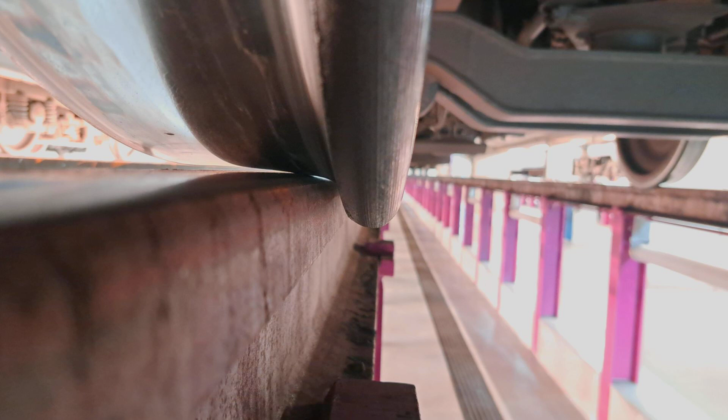Every train on Earth rolls on a contact patch smaller than a coin, 1 square centimeter between motion and disaster. The first rail wheel appeared 4 centuries ago, and how it turned friction into freedom is a story rarely told. In the dim galleries of 17th century minds, the future of movement rested on a circle of wood and iron.

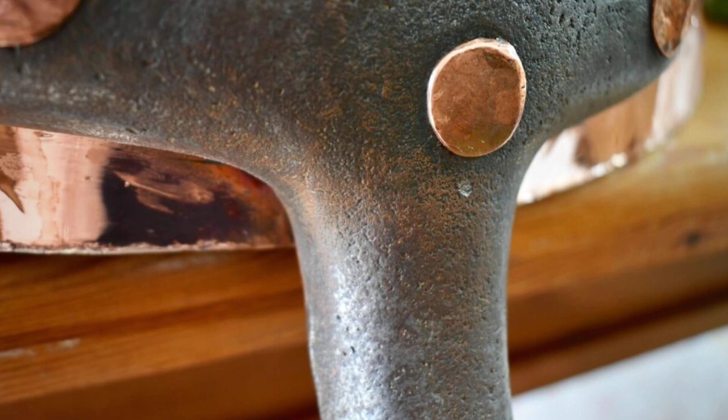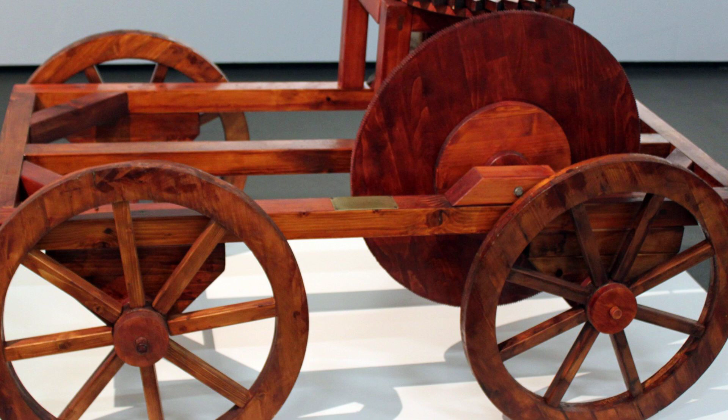Each turn of these wheels answered a stubborn problem: how to carry weight without grinding wood to dust. The iron rim did not erase friction, but it stretched the life of every wheel, buying days and weeks before the next repair. Yet even this hybrid, wood inside and iron outside, could not withstand the pounding loads that the coming age of steam would demand. These early wheels, humble and anonymous, set a challenge that would echo through every forge and workshop for centuries: how to turn the old enemy of friction into the promise of motion.

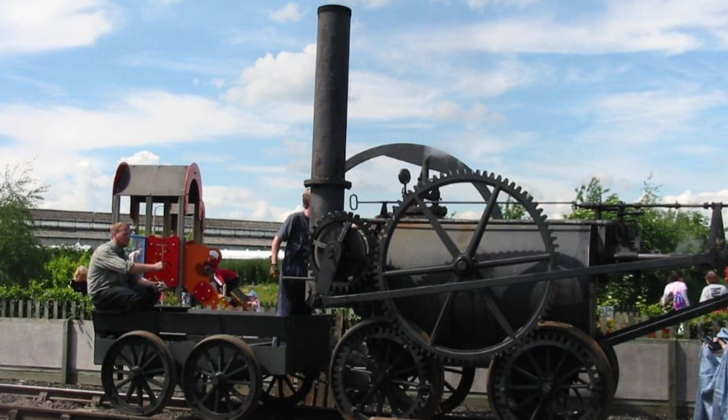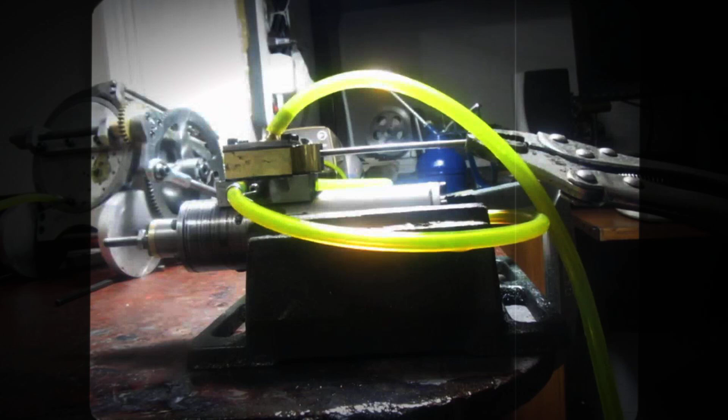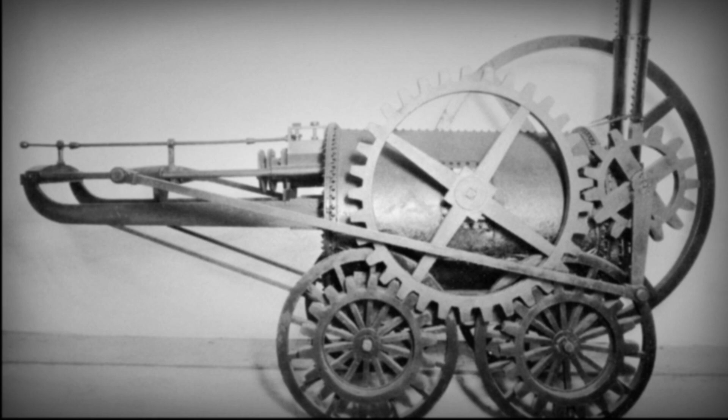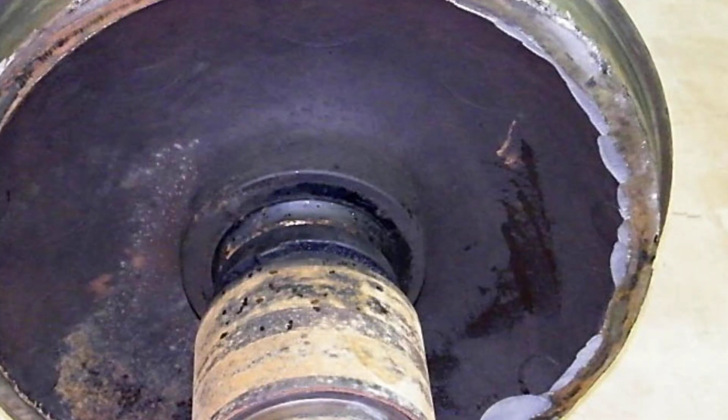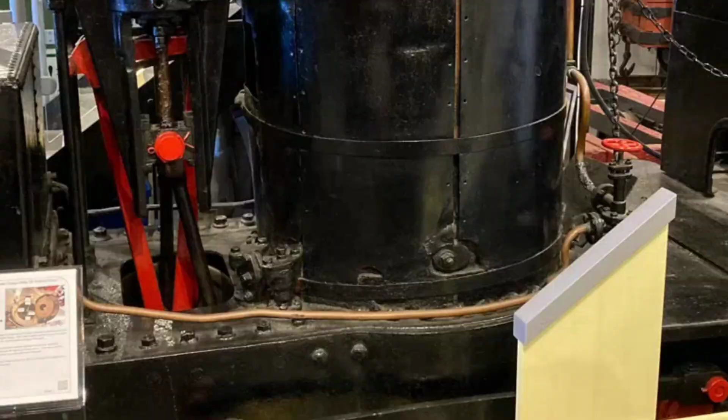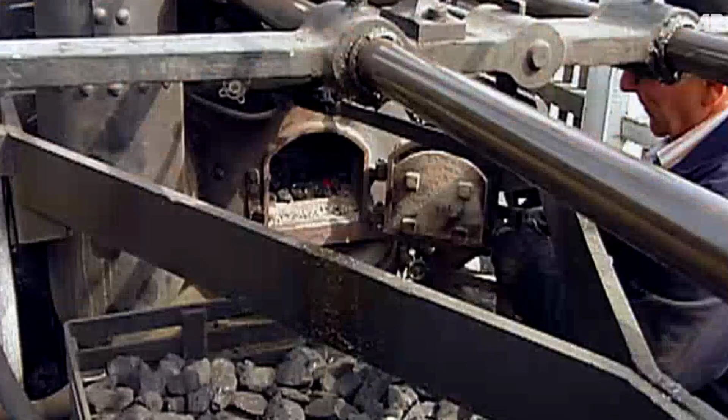Yet every revolution brought new problems to light. The cast-iron wheels, rigid and unforgiving, slipped on the smooth rails when rain or frost coated the track. Hairline cracks traced across the surface after only a few journeys, the metal protesting loads it was never meant to bear. Still, the Penydarren run proved that a wheel could do more than follow a rail. It could drive a new era forward if only engineers could solve the riddle of traction and endurance. In that first high-pressure trial, the wheel became more than a passive passenger. It became the engine's partner in conquering distance and weight, and it revealed the urgent need for better materials and new designs.

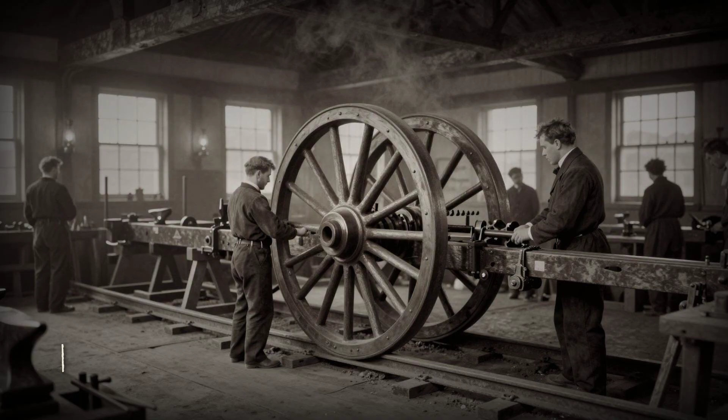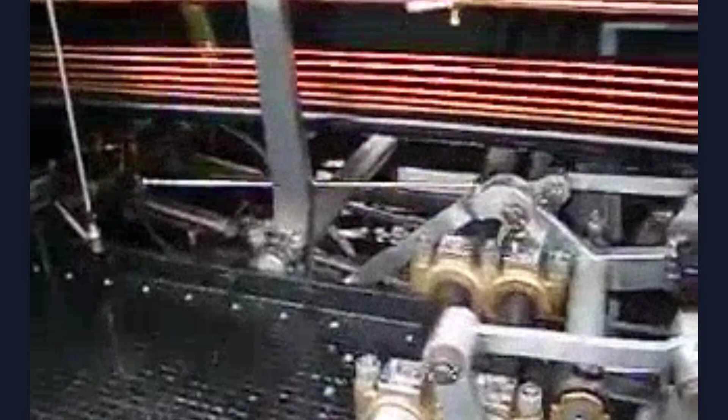John Blenkinsop faced the stubborn limits of friction head-on. In 1811, he patented a solution that sidestepped the problem entirely. Patent number 3431, a rack and pinion drive with a 12-inch pitch. Instead of relying on the smooth grip between wheel and rail, Blenkinsop's design carved a third rail of teeth into the track itself. His locomotive, Salamanca, built in 1812, used a steel pinion to bite into the rack, pulling coal trains across the Middleton Railway with a certainty that pure adhesion could not match. This approach let Salamanca haul loads that would have spun the wheels of Trevithick's engine uselessly on wet iron.

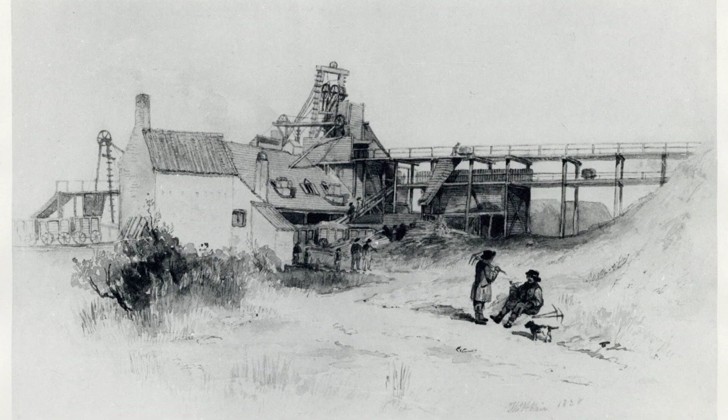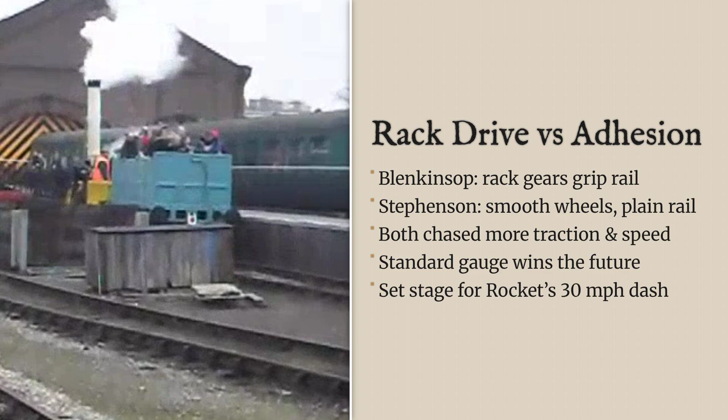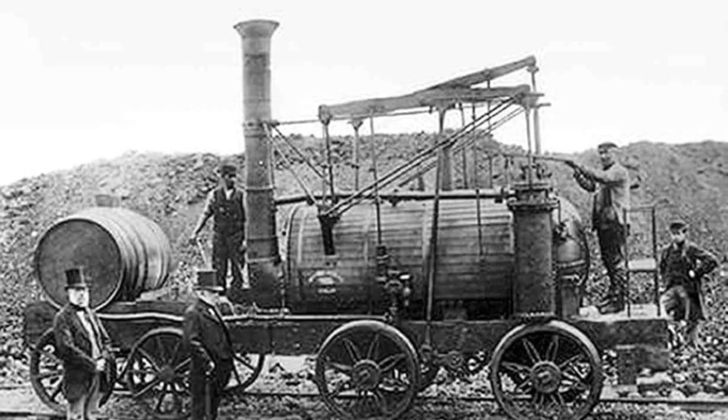But while Blenkinsop's rack system proved reliable on short industrial lines, another vision was taking shape. George Stephenson, working in the North, saw the future in simplicity and scale. He bet on direct adhesion, wheel on rail, and on the power of standardization. At the Rainhill trials in October 1829, Stephenson's Rocket averaged 12 miles per hour, peaking at 30 miles per hour on plain rails. The Rocket's performance convinced railway builders to settle on a single track width, 4 feet 8.5 inches. This standard gauge, rooted in the coal wagon ways of the North, would soon bind the rails of an entire nation together. 2 paths, rack and adhesion, custom and standard, briefly ran side by side, but it was Stephenson's gauge and the promise of ever faster, ever freer motion that won the future.

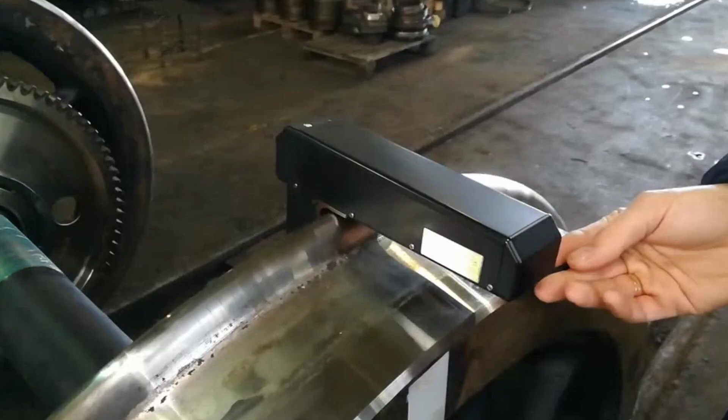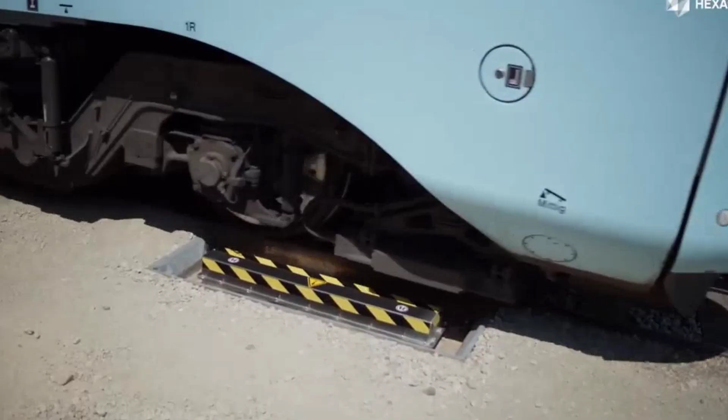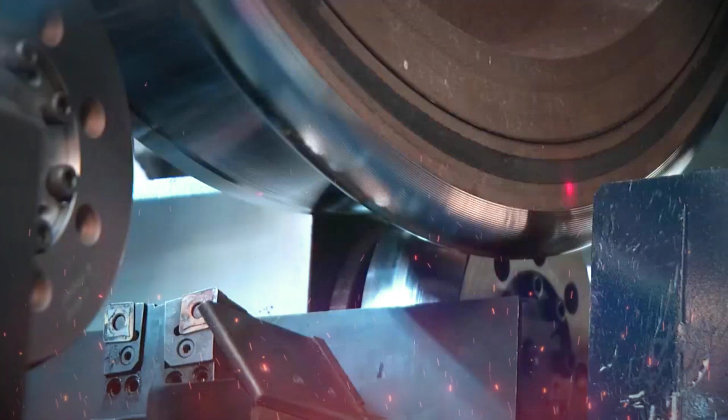A train wheel does not simply roll, it orchestrates a delicate balance of forces, geometry, and contact so precise that the entire railway depends on it. The secret begins with conicity, a subtle taper, often just 1/20 to 1/40, built into the wheel's tread. This slight angle means that as a wheel set shifts sideways on the rail, one wheel rides a slightly larger diameter while the other runs smaller. The result is self-steering. Each pair of wheels naturally seeks the center of the track, guiding the train smoothly through curves without slipping or binding. Without this, a cylindrical wheel would wander, risking derailment or grinding itself and the rail to ruin.

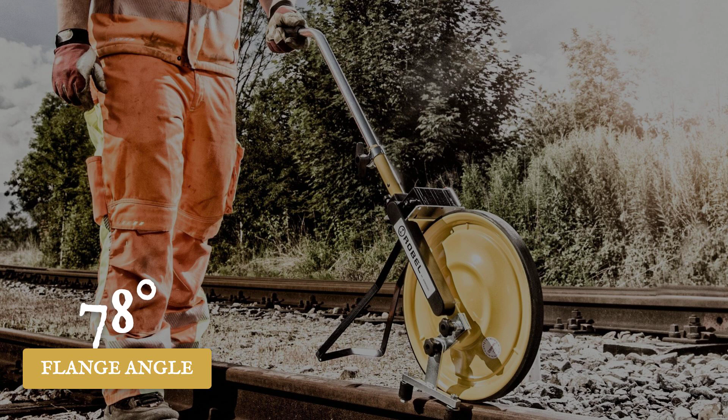But geometry alone is not enough. The flange, rising from the inner rim at an angle between 70 and 78 degrees, serves as the final guardian against disaster, catching the rail's inside edge if the wheel set drifts too far. This sharp steel lip rarely touches the rail in normal running. Its presence is insurance, not a crutch.

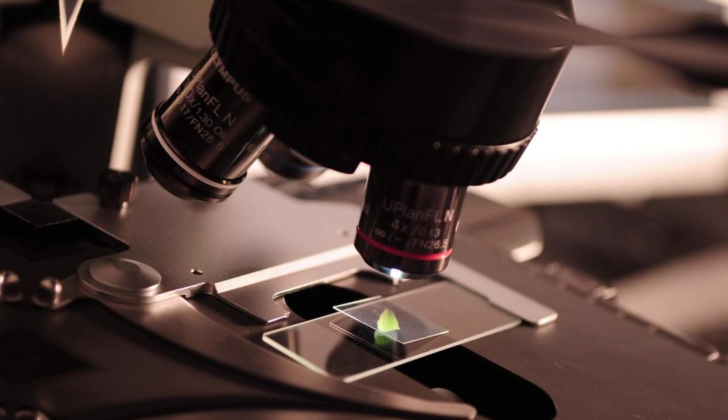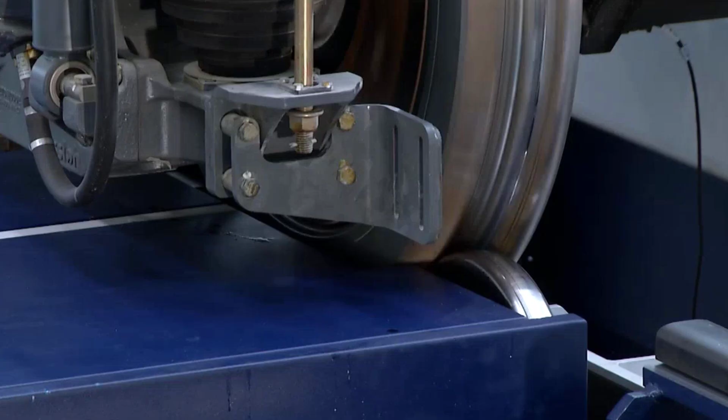At the heart of it all lies the contact patch, a sliver of steel on steel, no larger than a fingertip, about 1 square centimeter, where the entire burden of the train is focused. Here, rolling friction is transformed, not erased. The wheel glides forward with a resistance 100 times less than sliding. Every revolution, every journey across continents, depends on this silent, invisible partnership of shape and force. In the world of rails, freedom is engineered, 1 fraction of a degree, 1 square centimeter at a time.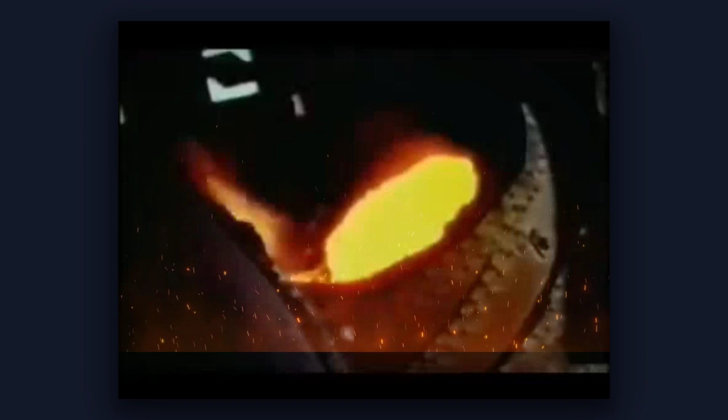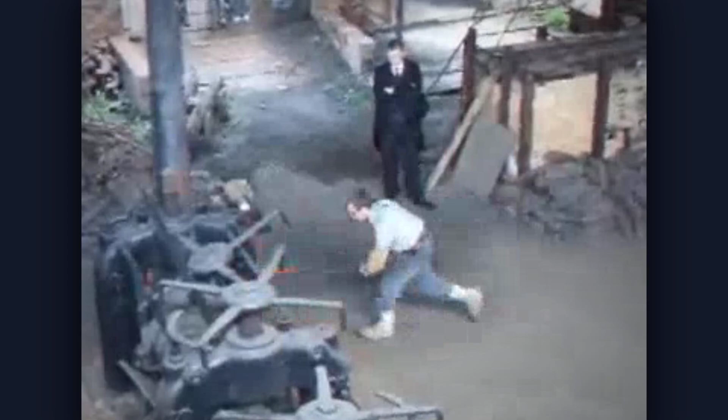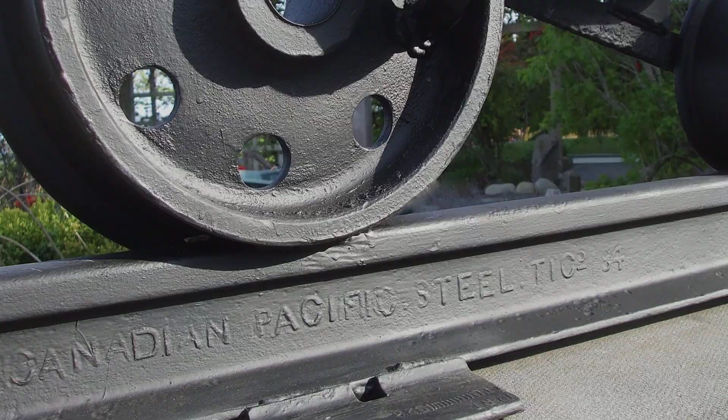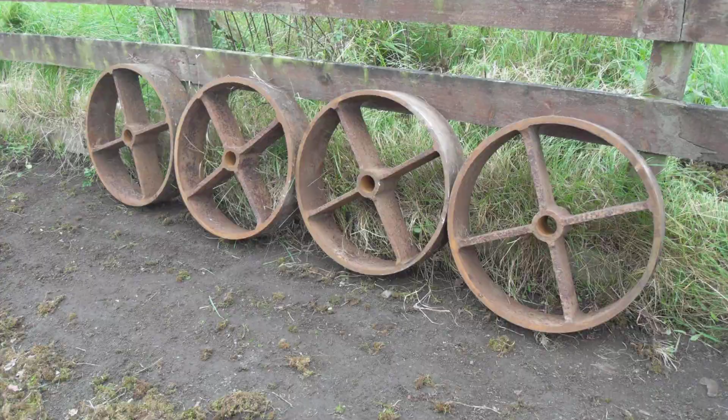In 1855, a new force entered the world's workshops: Bessemer steel. For the first time, molten iron could be transformed almost instantly into a metal both hard and tough, with a uniform grain running through every inch. This was not just a better material, it was a revolution in what wheels could do. Forged from a single billet, the steel train wheel shrugged off the old limits of iron and wood. Its structure, free of hidden seams or brittle joints, carried axle loads that would have shattered its predecessors. Where cast iron cracked under the hammering of speed, steel flexed and rebounded, holding its shape through thousands of miles.

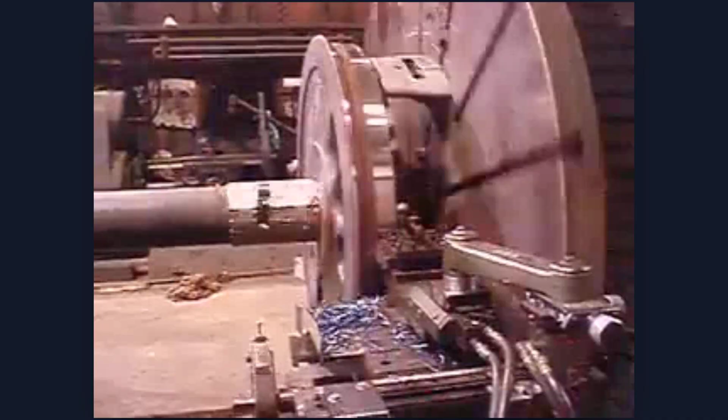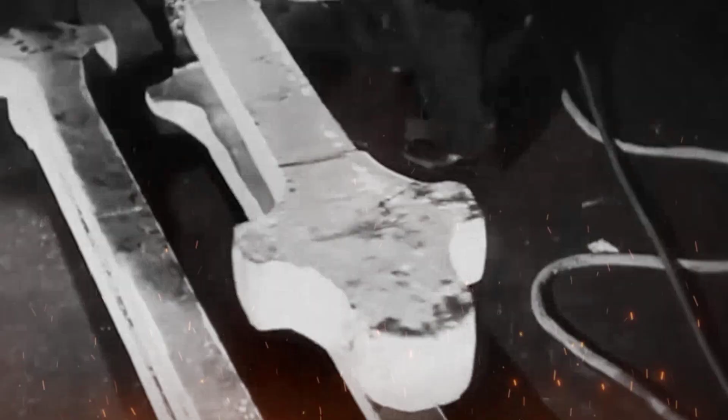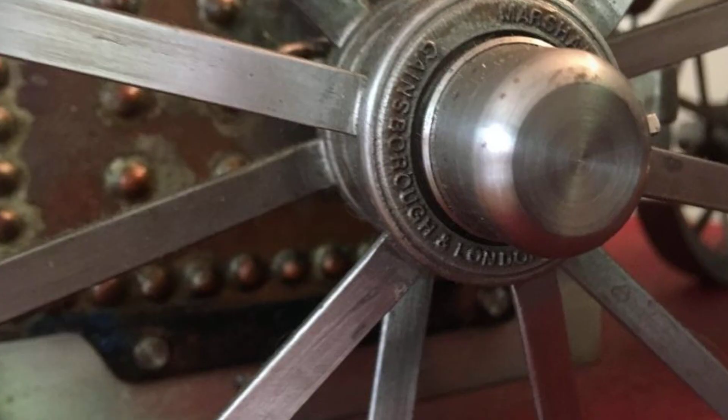Railway records from the 1860s show axle loads climbing from 9 to over 20 tons and express trains doubling their speed within a decade. The wheel's rim, machined to a precise conical profile, gripped the rail with a confidence unknown before. Every revolution now meant less loss to friction, less heat wasted, more distance conquered. The Bessemer process did not simply make more wheels, it made the railway itself scalable, capable of spanning continents and binding cities. In the heart of every steel wheel, the physics of motion found its perfect partner: strength without weight, endurance without compromise. Steel wheels still carry 75% of global freight. In every silent revolution, their legacy endures, reminding us that progress often rides on the quiet genius beneath our feet.